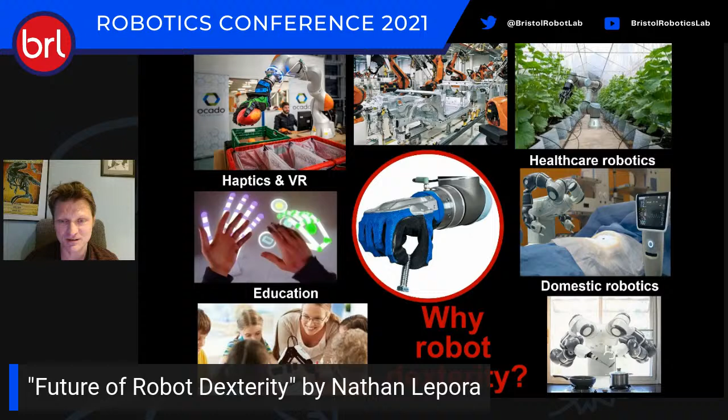So why would we want robot dexterity? This should kind of be obvious, because then robots can automate many of the jobs that we would like humans not to do but currently have to do — dangerous, dull jobs. They could be automated by robots if they had comparable dexterity to humans, which they don't currently have, because humans are still doing some of these quite difficult jobs. So that's why we need robot dexterity.

As I see it from my lens, it's kind of been the vision of the field since its inception, maybe 100 years ago or so. It's always been an elusive problem, but it does seem to be getting tackled at the moment, and there's been quite rapid progress made in the last 10 years or so, worldwide. I'm going to discuss contributions my group has been making in this area.

So the applications: once you get robots that can handle objects and the environment with the agility and dexterity of humans, a load of societally important applications become available — from automated logistics, distributing goods to customers automatically. A lot of that's still packaged by hand. Obviously advances in industrial automation, and agriculture, which is still a very human, laborious industry, particularly fruit picking and vegetable harvesting.

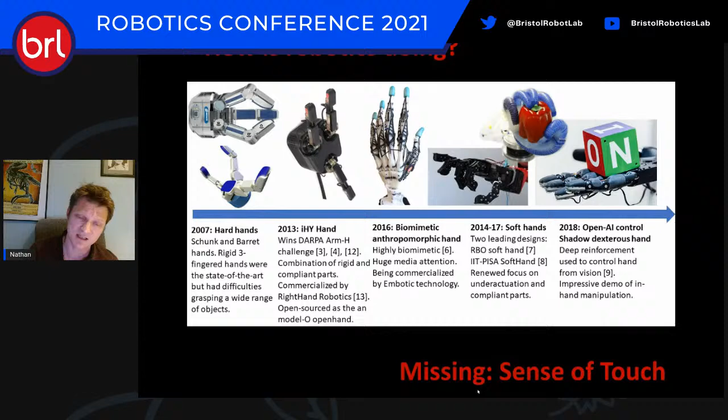So all of these hands and their applications are missing a sense of touch, and I'd see that as the missing ingredient needed to close the gap between the function of these sophisticated robot hands and the dexterity of the human hand. The human hand has been honed by millions of years of evolution into a general purpose manipulation device. Nothing else comes close. People talk about how fantastic crows are at tool use, or octopuses at unscrewing lids — we're surprised by that because it's something we can do, and we think of that as intelligent.

But actually, it completely pales into insignificance compared to the kind of things we can do with our hands, when you consider that all technology has basically stemmed from the use of our hands. I mean, you don't get animals building skyscrapers and digital computers, and to a large part, that has been enabled by our capabilities with our hands to develop technology.

So surely we should look to the human hand to design and deploy robots that are capable of human-like dexterity. And a necessary aspect of human hand function is our sense of touch. Our hands don't work properly if they don't have a sense of touch. So how do you do robot touch? This is the kind of question I asked myself several years ago when starting the lab. What do you need to do to get advanced robot touch that's similar to human touch?

Well, it's a challenge because of the number of different disciplines that are needed to address this problem of how to do robot touch. So you need to go from soft robotics, as I was discussing earlier, to advanced AI. That for sure is going to be critical in the control and use of the hands. We've had a revolution recently in AI over the last 5-10 years. So that's surely part of the puzzle.

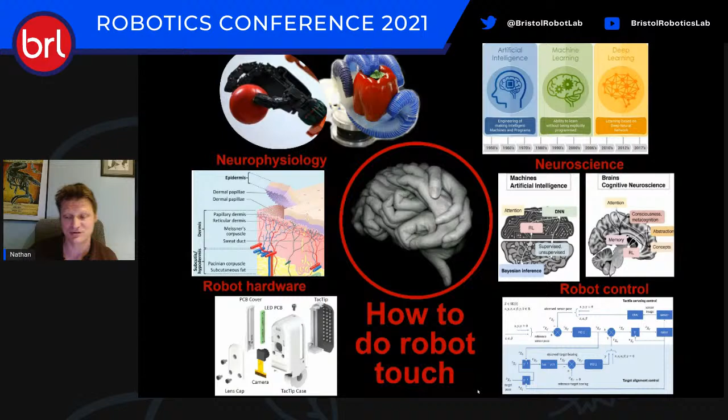And then you obviously need this hardware isn't available to buy, so you need to make it yourself in the lab. So you need to know about how to build and design robot hardware. And you also need to know about how to do robot control, where there's 50 years of expertise in robot control that you should look to as well for controlling these hands. So it's a challenge because of the interdisciplinarity that's required to tackle this question.

So coming to the work in my lab, I would see our place fitting into the field as soft biomimetic optical tactile sensing. So I'll explain what that means.

So the hardware that we use in my lab is called the BRL TacTip, tactile fingertip. It was invented before my time at Bristol. Jonathan Rossiter led that research. He's now obviously a well-known figure in Bristol, in soft robotics internationally. So he led that work with Craig Chorley and developed the original design of the TacTip about 12 years ago. And then I'll discuss what my lab has been doing with it since.

But the idea for the TacTip is it was inspired by the structures within human skin that I'll come to, that basically act as a kind of magnifier of the contact on the skin. And then there's a camera inside it, which I'll come to why that's a good thing in a minute. So it's a form of tactile sensor called an optical tactile sensor. So I kind of refer to this as a SoftBOTS because it's a soft sensor, it's biomimetic, it's optical, it uses a camera, and it's a tactile sensor. So I see that as a SoftBOTS.

Now, soft biomimetic optical tactile sensing - as I said, the key things are there's a biomimetic transduction mechanism, whereas the structure of the 3D printed tactile skin mimics the structure between the top two layers of human skin, the dermis and epidermis. In human skin, there's this 3D structure where the outer stiffer layer of skin, the epidermis, protrudes into the softer layers of skin underneath, the dermis, with these dermal papillae, and they act as levers in our skin, which amplifies the contact at the surface to the mechanoreceptors, which are distributed around these papillae, and basically turn that contact into nerve signals.

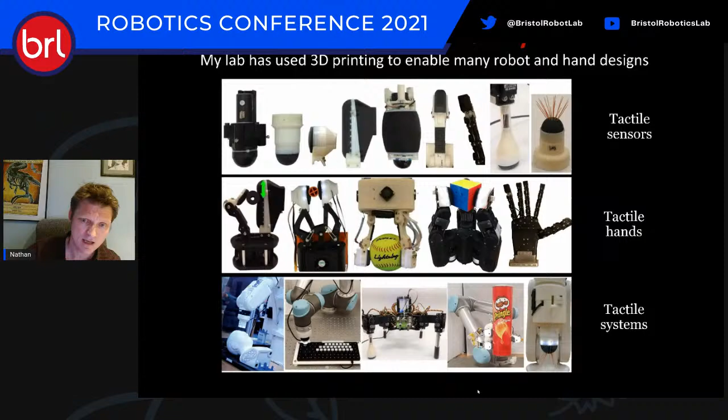Okay, so how does it work? It's biomimetic. In the skin, there are two types of mechanoreceptor, which turn skin deformation into nerve signals. One of those is called slowly adapting, which we represent as movement of the markers, and they give geometric information about the contact. Strangely, what they pick up is not pressure, not indentation in the skin, but shear in the skin because of these sideways movements of the markers.

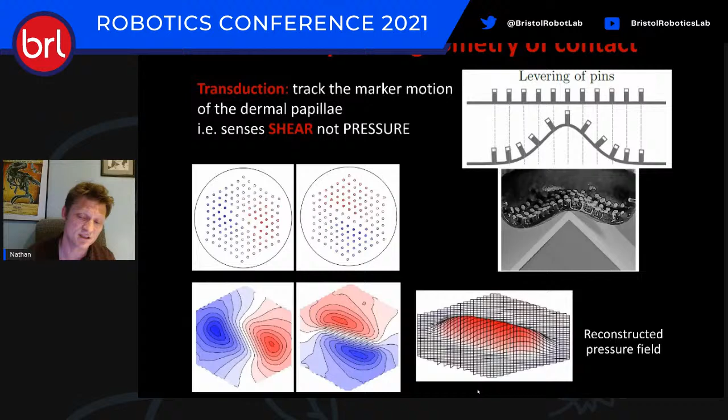Now, human skin is known to work in that same way. It's quite counterintuitive — we don't feel pressure directly, we actually feel shear directly at the surface of our skin. That is mimicked in this design of the sensor.

The other type of signal that comes from the skin, which we mimic in the tactile sensor, is called rapidly adapting sensors. We use a measure of marker speed for that, and it turns out that signal is really well suited for detecting changes in contact, such as slippage.

Now, slip is a really important capability for our hands, because the function of our hand is to pick up objects and carry on holding them. So it's important to know if we're about to drop them as we're manipulating or holding them. We have a sophisticated sense of slip detection in the skin.

It turns out that this design of the tactile sensor, although it was designed for different reasons — biomimicry and edge detection — gets this slip detection capability right. So this sensor is a very effective slip detector. We've had a stream of work with Jasper James, who's worked this through in depth.

There are other biomimetic functions that can be brought into the sensor that I won't go into here, but as a lab we've been looking into the other functions human skin does, the other properties it has, and how this can be brought into the design of the tactile sensor to give it the capabilities of human touch sensing, which we think are important for dexterity.

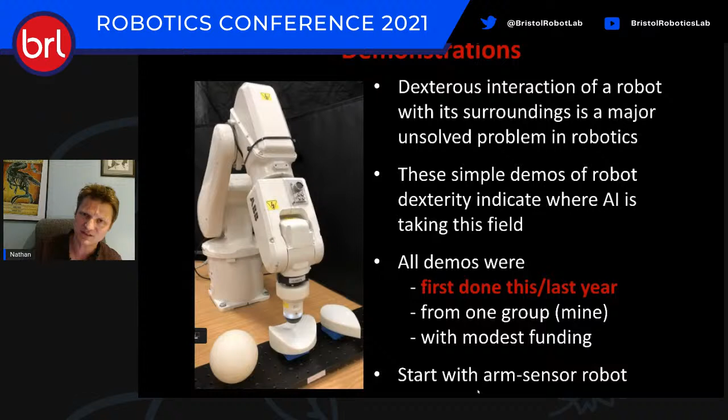All of these demos were done fairly recently in my lab, in the last year or two, and all of them relied on using AI techniques such as deep learning — that was really the enabling step to getting some of these capabilities you're about to see. The papers are at the bottom of the slides; if you notice, they're all 2020, 2021. I want to emphasize that, because it shows how quickly this field is moving — we're one group, and there's a large field in robotics advancing quite rapidly.

Firstly, on to tactile grasping. This was the hand that Jasper built, the tactile Model O. This is the hand I mentioned earlier that won the DARPA Grand Challenge, and then they open sourced the designs. We built those open source designs in our lab and integrated them with the tactip — we call this the tactile Model O. So I'll show you what kind of things we do, or Jasper does, with that.

So this is an example of a hand — the hand is very good at picking up objects. There's a few wires and stuff here; we've been working on improving the prettiness of it. But the hand is very good at picking up objects, because that's why it won the DARPA Grand Challenge.

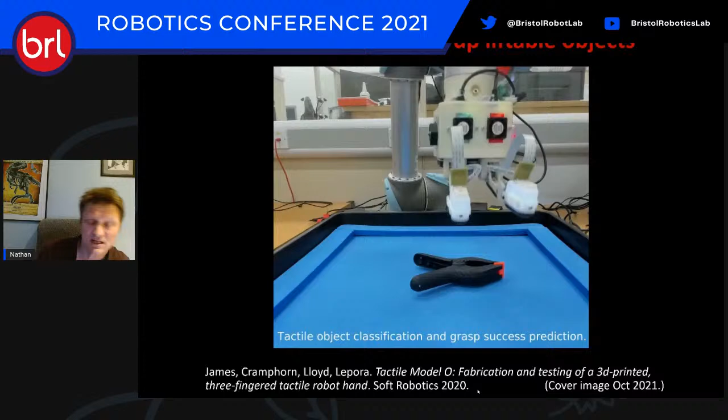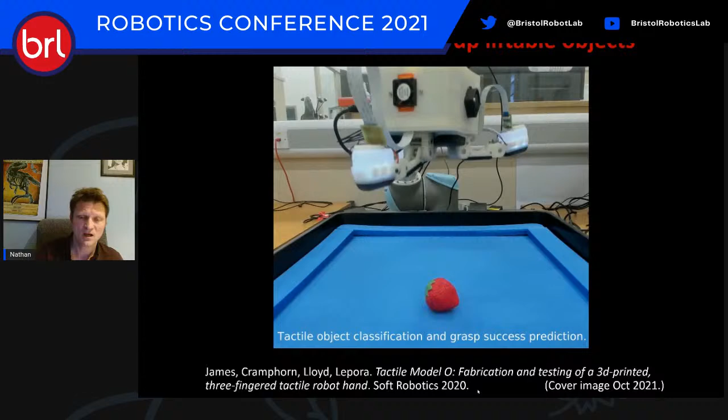What the tactile sensing here does is enable, firstly, recognizing what the item is—a useful capability. For example, in this case it will successfully recognize it's a strawberry. But another useful capability is predicting whether, when lifting that item, it's going to be a successful lift or not. That's useful—you want to know if your grasp is secure before you use it.

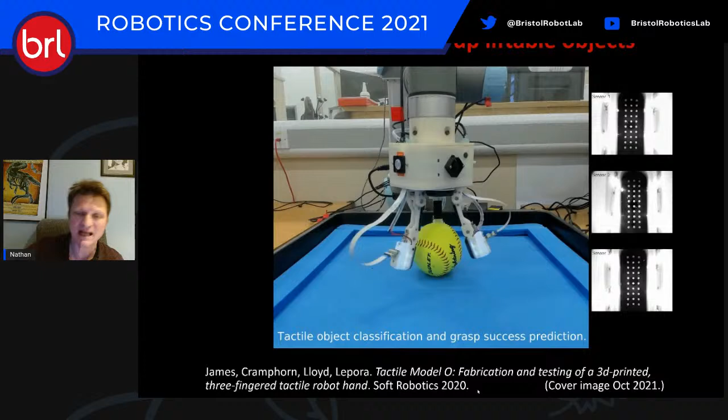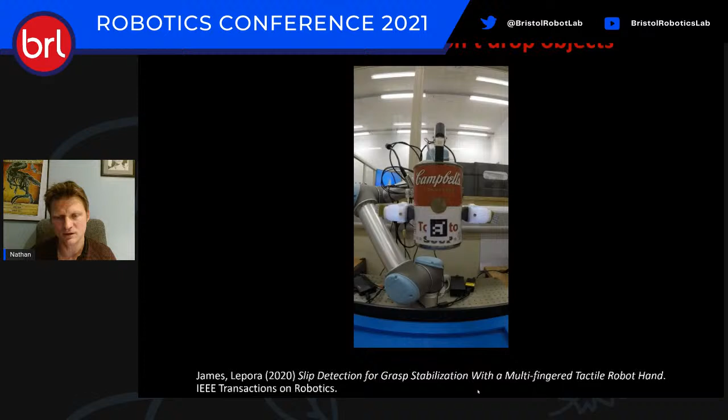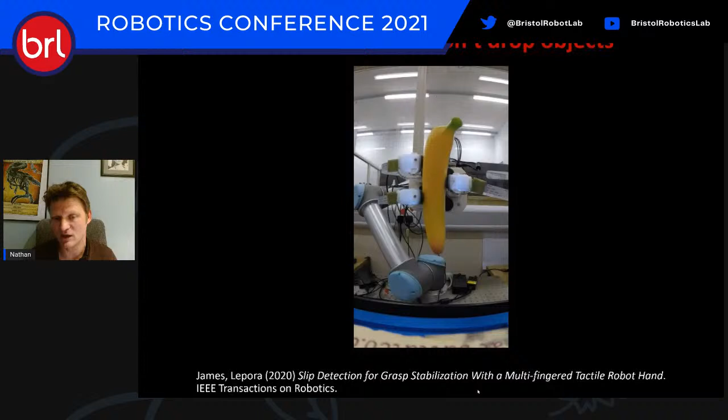Here's an example of slip detection. As I was saying earlier, the tactile sensor is an effective detector of slip. What it's doing is detecting global slip—relaxing the grip until the item begins to fall, then detecting it and managing to recatch it before the item slips from the grasp. This is actually quite hard because the robot has to react very quickly and reliably to recatch an object as it's literally falling. Jasper worked hard on this, and sometimes it fails, but 95% of the time it works, demonstrating that the hand can detect slip and correct for it through touch.

Okay, so I'll move on to some other applications now.

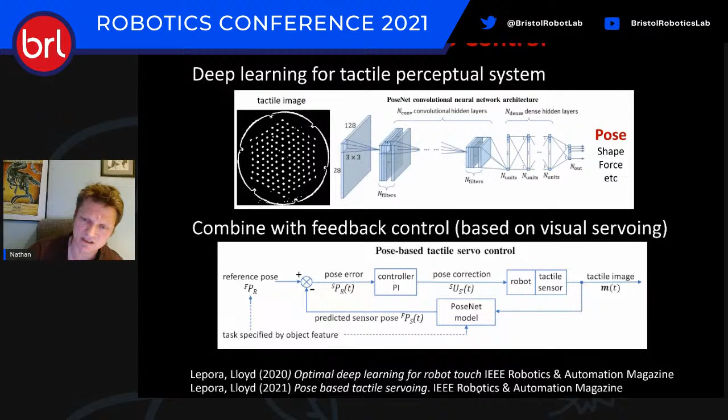So we're going to do tactile servo control. This is a combination of deep learning for tactile perception with feedback control based on visual servoing. The details aren't so important, but it's kind of analogous to a PI control loop, integrated with deep learning methods for processing the tactile data.

So this is the kind of thing you can do with that—you can now feel and explore over quite complex 3D shapes, just using a sense of touch, with a fairly basic controller but a fairly sophisticated perception system.

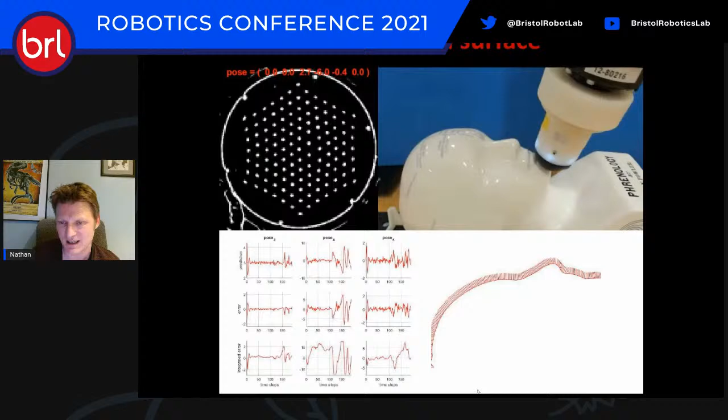There's a lot of generalization happening here. It was trained on something that didn't look at all like this porcelain bust—it was trained on a kind of flat plane, but then generalized well to this bust, and basically it just works. It feels over the shape, and it doesn't break itself or the shape.

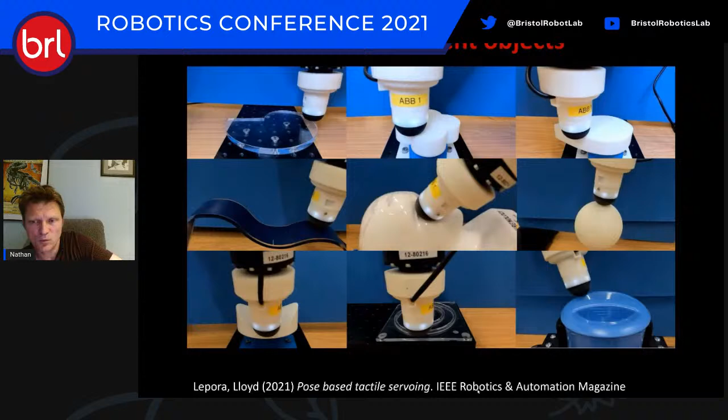And then the same algorithm, nothing's changed—exactly the same algorithm—because it has this kind of generality, can work feeling around all the complex shapes we had kicking around to try it out. This is a direct analogy of feeling over your face or your hair. It's something we perform subconsciously in humans all the time, but it's actually quite a challenging task to set up in robotics, and we managed to crack it using modern advances in AI to get these capabilities.

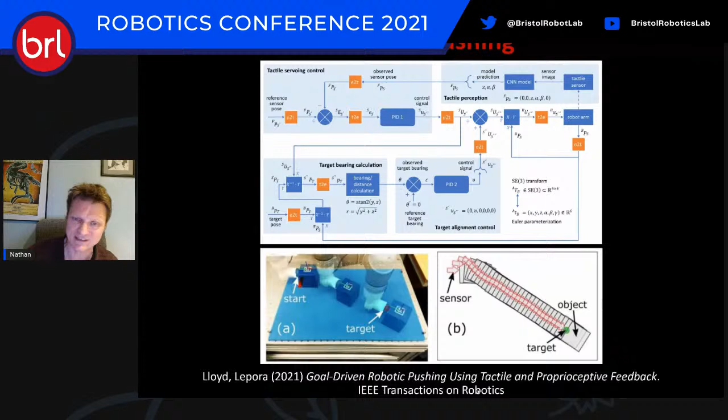Okay, so non-prehensile manipulation—this is manipulation not using hands, but using single fingers. It's also based on this tactile servo control, but John Lloyd, who did this work, is a better control engineer than I am, and he has a quite sophisticated control loop. But it's basically a version of servo control like I was showing earlier.

Now, just using a sense of touch and knowing a bit of information about where the end effector is and where you want to push the item to, it's able to push these objects to a desired goal location—successfully pushing them even in kind of adversarial conditions where you set it off in the wrong direction. So it works very robustly.

And then we threw some more objects at it to show its generality. The key thing here is we see this as a kind of precursor to in-hand manipulation, because this is sophisticated manipulation in a planar environment, and you can imagine scaling that to multiple fingers—you'd get, in principle, some quite sophisticated ways of interacting with objects. As I emphasized, this is just using a sense of touch, there's no vision here.

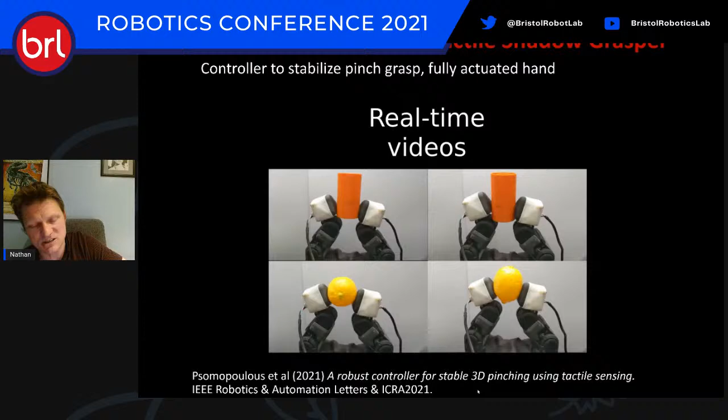It's kind of like blind pushing an object, and that appears to be cracked with this method. So in-hand manipulation, we're a bit behind where we are with non-prehensile manipulation, because of the extra difficulties in getting these methods to work on robot hands.

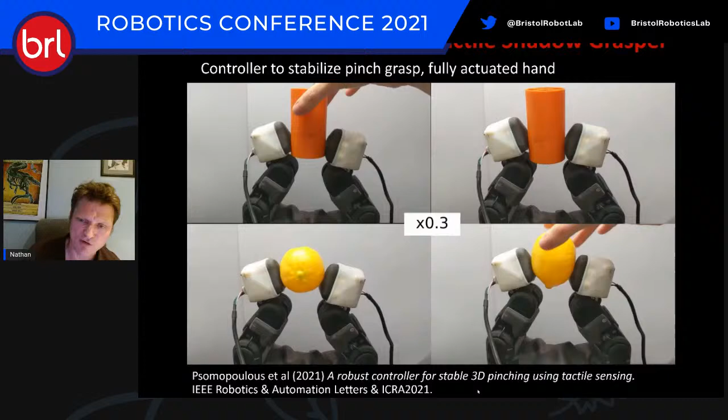But where we are, Effie's done some work recently on in-hand, a controller for stabilizing grasps with a fully actuated robot hand. This uses similar servo control methods, but instead the controller tries to stabilize holding the object, and then once you've held it, Effie's taken this work forward into how you can manipulate the object and move its pose around in hand, which is something she's working on at the moment.

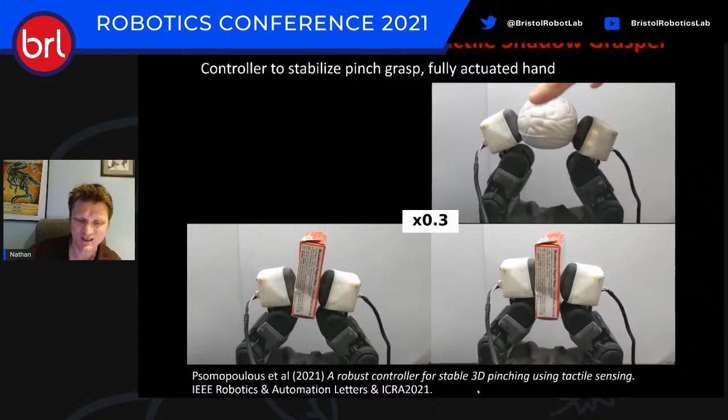We're also moving into integrating with anthropomorphic, human-like robot hands. One key thing to notice is that we have the sensor down at the same size as a human fingertip. That was a key developmental advance, because that's a route that wasn't possible before, but it's clearly key for using on realistic hands. Then there's a basic example of in-hand manipulation here, just to validate that the sensor's working. But this is, again, something we're taking forwards.

Okay, so I'm going to finish on tactile skill learning. This is a different way of approaching the control of touch. Again, we're using deep learning, but now instead we're using deep learning to predict the actions rather than trying to perceive aspects about the input. So it predicts what the robot should do. And then to train this, we're using deep reinforcement learning to learn a tactile skill.

You're just using reward to shape the task. If you give a robot a task, say pushing an item around, and it does it properly, it's given a reward, told good boy or girl, and then it tries to hone its action selection system in a way that it will get the most rewards in the future.

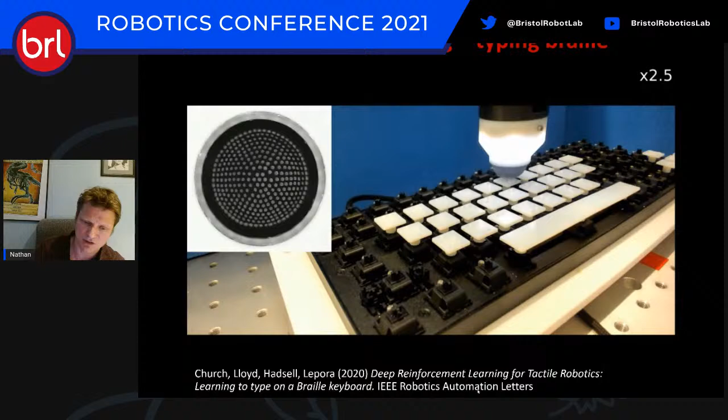These are the same methods that DeepMind used, and actually this work was in collaboration with DeepMind. These same methods have been used to play Go and beat humans at Atari games, etc., but here applied to a tactile robot. This is what Alex Church has been doing in his PhD, co-supervised with DeepMind with Raia Hadsell. This is the first demonstration in the field of deep reinforcement learning working with a tactile robot.

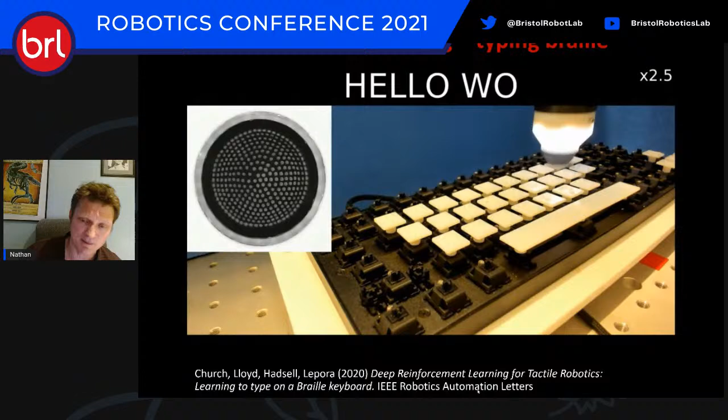This was learning to type on a Braille keyboard. The robot needed to learn the layout of the keyboard and the keys, and then in order to type, which took it a couple of days to do, but it got there.

That was published last year, and just out is Alex's latest work. Now instead the robot is trained completely in simulation, so it hasn't been near the real world. Alex set up a simulated environment on a fairly basic computer, not that advanced a simulation. He trained the action selection policy completely in simulation, and then through some clever machine AI methods, transferred that policy to the real world, and it works first time on the robot.

So basically the tasks I was shown before, that we could solve using more standard machine learning methods, can now also be learned using deep reinforcement learning in simulation, and then it just works first time on the robot.

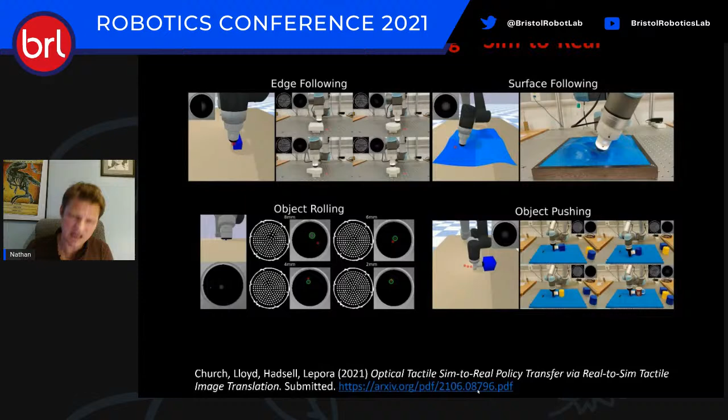We see this as a key step, because the challenge of applying deep reinforcement learning to robotics is the amount of data it needs to train. In learning how to play Go, they played literally millions or hundreds of millions of games to get the agents to learn. That's unrealistic on real robots because they have to work in the real world. But this technique enables that to happen, because they can learn in simulation and then transfer that to the real world.

Okay, so I can see I'm running out of time. I just want to do some take-home messages. Robot dexterity using... or shall I finish now? No, fine. You still have 4 minutes. There's one question in the chat as well, but please do your take-home messages, and then we maybe have time for questions. Okay, so this will take about a minute to 30 seconds.

So, take-home messages: robot dexterity using touch is still a pale shadow of human dexterity, but as you can see, all that progress I've talked about happened in the last year and a half or so, and this is just one lab, my lab.

There's about 15 people at BRL. At Bristol, there's a whole world of people working on this field who are also moving very rapidly as well. So this is really starting to look achievable as a goal, and I would see this as happening this decade. I'd say so, research in this field is moving very rapidly.

Deep learning appears to be the key to unlock human-like dexterity in robots, and in our lab that perfectly complements our use of soft biomimetic optical tactile sensing.

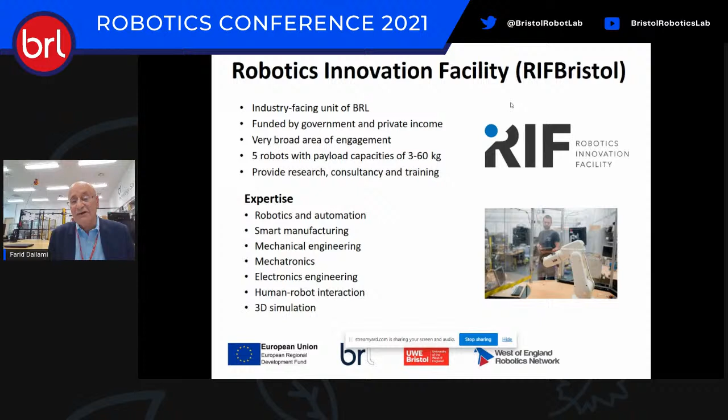So we're very fortunate insofar as we can help those who want to look at automation, robotics, digitalization, etc., by enabling them to come in and talk to us. We can demonstrate ideas using robots, we can talk to our colleagues in BRL, and essentially try to get a synergy with both hardware and software and expertise. So it's a very useful place to be for those who are aspiring to go into robotics and automation. Currently, we're running 3 different projects.

At the moment within RIF, we have something called RIF Saver, which is an ERDF funded project, and that allows us to provide, within close proximity to Bristol, a free service. I'll talk about that in a second.

We also have something called TERRINet. This is a pan-European project. So if you wish to do some robotics, and for example you're developing a medical instrument, we have colleagues in Italy, so you can contact them through us and go to Italy to do some very early stage work, and you'll get reimbursed for your travel costs, etc. It's an excellent mechanism. Please come to us if you have ideas about the sort of robotics you want to do, which is very advanced, around PhD type application, and we'll search around to see whether TERRINet can be of use to you.

We also are running a project at the moment with Rolls-Royce, where we're looking at using robots for welding. Again, this is something funded for about 3 years. So we do run a number of projects, and we engage with both application and research in those areas.

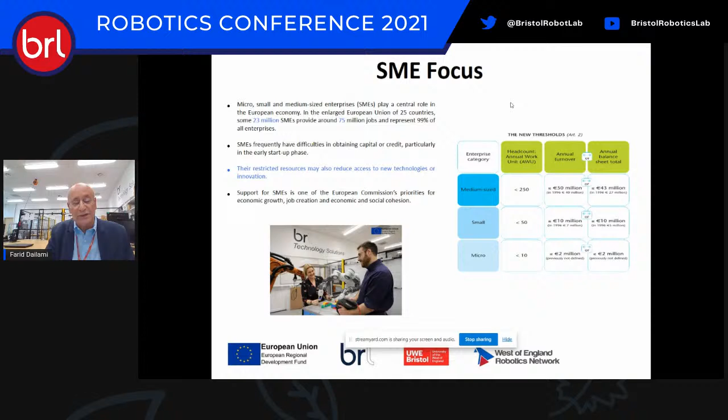That doesn't say that we don't engage with others. As I said, one of our projects at the moment is with Rolls-Royce. So we do engage with all manner of companies, but SMEs tend to be quite important to us.

To some extent, this is the sort of thing we're trying to help with. When you're looking at technology maturity, we can start in a lab and develop ideas, and there is funding available, so we can get ourselves up to a certain stage with that funding. But then once we're at that stage, funding dries up. This region is called the Valley of Death, where good ideas can actually die because there is no monetary support.

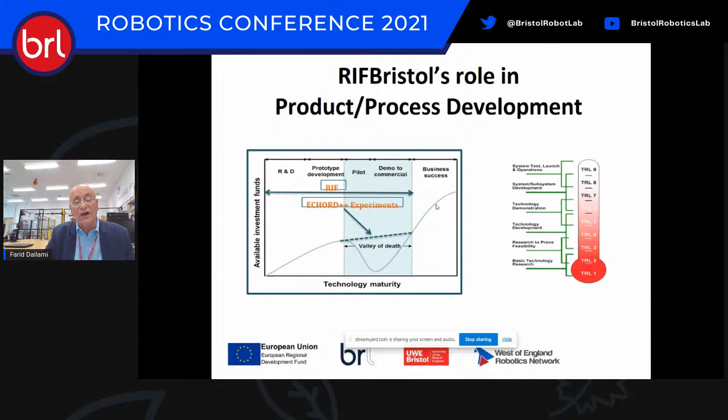So what we tend to do is try to see if we can bridge that gap with the capabilities and funding that we have. We've gone beyond stage 3 and 4, trying to get ourselves to TRL 5 and 6, to try and cross this funding gap, and then hopefully take the company, the product, etc., up to the stage where they can become a business success, in terms of knowledge acquisition, knowledge embedding, and exploitation, which are the key stages of innovation.

That's what we're trying to do. We in RIF are very good at identifying what sort of knowledge you need in terms of implementing robotics, digitalization and automation. We have access to lots of expertise inside RIF and outside, to enable you to raise your awareness of what knowledge is available, in order to put that knowledge into your product or your processes, and hopefully get to a stage where you can do exploitation, and then claim that you have an innovative process or project. So RIF is very instrumental in meeting that very early stage knowledge acquisition.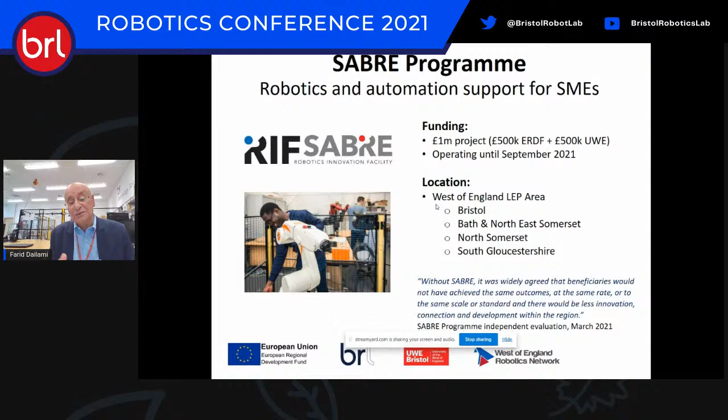In terms of funding, the current program running is SABRE, and we have about £1 million. We've had about £1 million, and we will finish around September 2021. But there are efforts afoot to try and extend that and go for another 2 years if we can. It is centered around Bristol, and it is centered on SMEs. So if you're an SME in this area, and you have some ideas in terms of automation and robotics, please do contact us, and we might be able to help you and enable you to get

your aspirations realized. The kind of product we have is a 2-day workshop. So we bring you in, we talk to you about robots, and we let you play with robots.

So it's not a question of just chalk and talk. The core of it is for you to get experience in terms of robotics. So if you have some interest in that area, please do contact us. At the moment, COVID has caused some issues with that, but as soon as that disappears, hopefully we'll get back to normal and be able to start having physical workshops in this place. But do contact us so that we can start to put you in our program.

The other mechanism that we can engage with you on is called a technical development project. As an engagement, we can work with you from around 5 days to 12 weeks. So if you're eligible for SABRE support, then this is something that we can do with you. We can do feasibility, we can do prototype development. There are many mechanisms by which we can engage with you.

So in terms of some case studies and some examples, here's an example of somebody who came in. Basically, what this person does is develop natural history footage. Some of the areas that he works in are producing footage for insects and ants and stuff like that. And basically, what he wanted was to try and capture footage of, say, ants moving around on a bark of a tree.

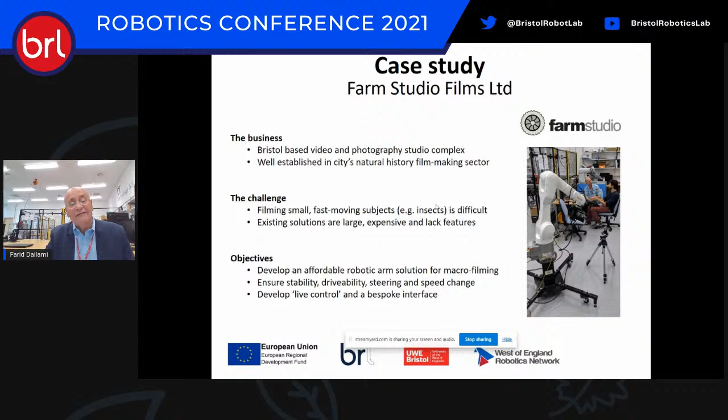We brought that in and put the camera on that machine and developed the software and ran that particular arrangement of camera and smaller robot, and we got excellent footage. So the company was then thinking, okay, we can get this, and they did. It was affordable as far as they were concerned. It wasn't a brand new robot; it was a reconditioned robot, but nevertheless, it fulfilled their requirements. Now they have one of those in their place, and they can do various types of footage.

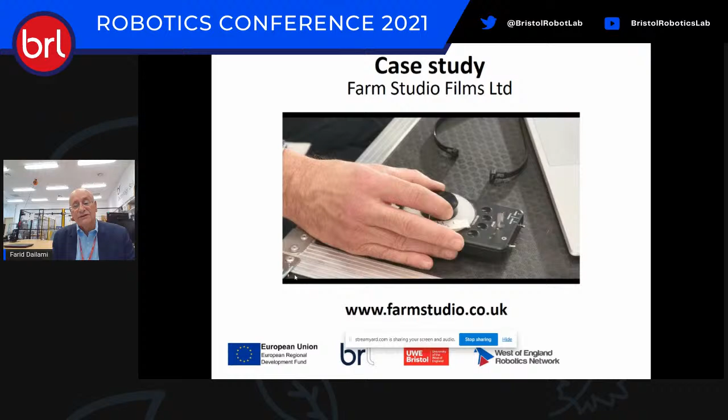Just as an example of the sort of thing that he's been doing - he's not a roboticist, but he's controlling that robot with some of the software that we produced for him, and now he's capable of... this was a trial... capturing excellent footage using that particular system. So that was a huge success. He's delighted with what he's getting.

We had another company that came in, and they are again a startup. They were looking at laying down composite bands in manufacture of composite components. They have a very new process whereby they can, if you like, shear the fibers as they're laying the fibers down. That will allow them to change direction of motion and will allow them then to basically produce complex shapes. And they came to us and said, this is something that we want to do, but we're not quite sure how we integrate our end effector that sits on the end of the robot with a robot. How would we go about that?

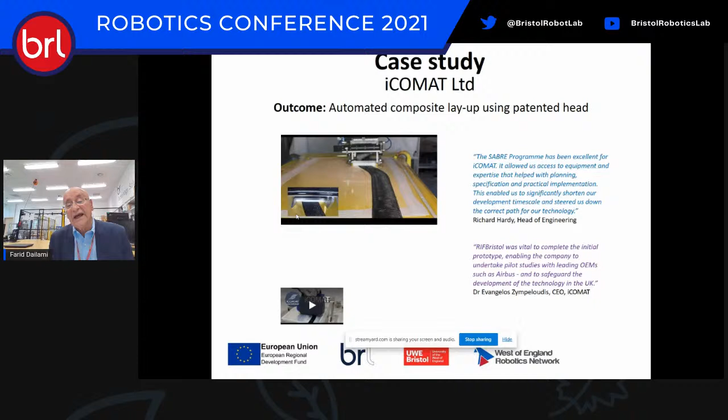We addressed that. One of our engineers looked at that, and we did the integration. And what happened after that was that we now have this kind of demonstration. You can see the shearing is taking place, and the direction is changing without wrinkling or introducing other defects in the lay-up. So this again has proved extremely useful. Without the existence of RIF, it would have been difficult for ICOMAT to have progressed as far as they have. So this is another example of the kind of thing that we've been able to do.

We've recently been working with a company that produces a gap measuring kit.

So if you imagine you have a car door and there is a gap between the car door when it's shut and the body. One of the applications is that their laser-based equipment can actually measure the gap and the depth, but they wanted to mount it on a robot. So they came to us and said, well, we know we can hold this device by hand and scan, but we want to automate the process. Can we do this? And again, we demonstrated for them that yes, this was something that we could do.

In the process, we collaborated with Universal Robots, and Universal Robots have developed an intermediate set of tools that will allow developers to develop interface tools between what the end effector tool is and what the UR system is. We have developed that kind of interface for Third Dimension, and that again has worked out exceptionally well. We have a little video from UR.

Hello everybody, my name is Stefan Kollmannsberger and I'm working at the UR Plus team at Universal Robots. We at Universal Robots aim to enable access to automation to everyone. With this in mind, our cobot is laid out to be programmed so easily that non-robot experts can create their own applications. We include a wide variety of safety functions to reduce the time for a proper integration substantially, which can even allow the cobot to work side by side with its coworkers. As our cobots are integrated in a wide array of different applications, they always interact with different third-party products, like grippers, camera systems, linear axes, etc. The integration of these parts alone could take days and needs expert knowledge to implement, which is in contrast to the overall UR programming experience. To counter this, Universal Robots created the Universal Robots Plus Partner Program, or short, the UR Plus program. The UR Plus program behaves like an ecosystem of plug-and-produce products, which are validated and tested by UR to assure compatibility and ease of use with our cobot, and are focused on our customer needs. This means we support our partner companies all around the globe, integrating their products into our cobot. With this, by purchasing a UR Plus product, you do not only receive the needed hardware to connect directly to the UR, but also get a piece of software, the so-called UR Cap, which is tailored to the product's needs, lives within our teaching environment, and offers you the same easy programming experience as the UR itself. Since introduction in 2016, the UR Plus ecosystem grew steadily, with now over 200 UR Plus products available in Europe alone. On this journey, we also met the company Third Dimension, located in Bristol, and the Bristol Robotics Laboratory. Third Dimension offers great non-contact profile measurement solutions, which are also fitting for being operated by a robot. Seeing the opportunity for a collaboration, they reached out to us and we started the process of becoming a UR Plus partner with them. During this, the Bristol Robotics Laboratory helped Third Dimension by developing the UR Cap, the software controlling Third Dimension's tool through the Universal Robot. It was an outstanding experience working together with the Bristol Robotics Laboratory and Third Dimension, as they were doing an excellent job integrating their product in the UR and offering an elaborated and easy-to-use solution for our cobot. Thanks to all the colleagues of Third Dimension and Bristol Robotics Laboratory for allowing us to be part in this great journey. We're looking forward to having this product in our UR Plus ecosystem soon. Greetings from Munich and all the best. Bye.

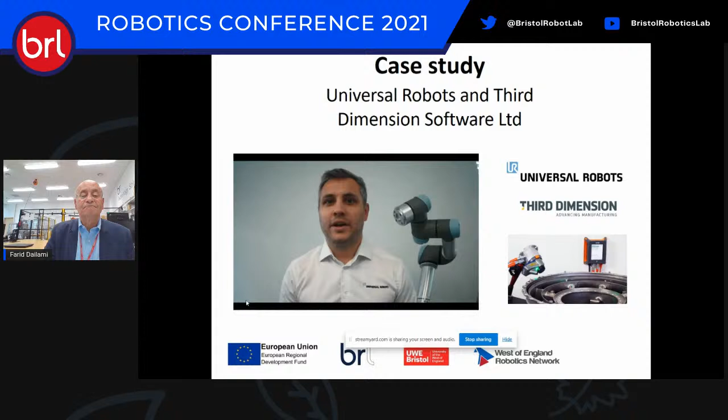So that's an example of the kind of thing that we can do with both, if you like, a robot supplier and a client. We can really go deep into that collaboration and develop very useful tools to allow very quick programming of end effector tools. Both the one with Universal and the one with KUKA have proven that, yes, we are well capable of developing facilities for people who want to use robots.

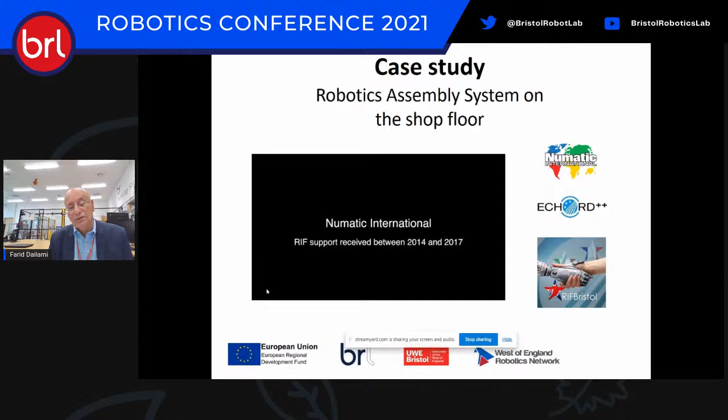We also have worked on much bigger projects. This one was with Numatic International, people who make vacuum cleaners. This is an example of the kind of thing that we got engaged with, again, very deeply, trying to figure out how can we reduce repetitive strain injury and allow the company to improve its productivity. And this is what we did. We developed a robotic application, again using various tools to try and explore potentials for looking at assembly of vacuum cleaners. This was then taken into the development shop at Numatic, and they developed, with our guidance, this particular assembly process. And we got to a stage where we could demonstrate the effectiveness of this process.

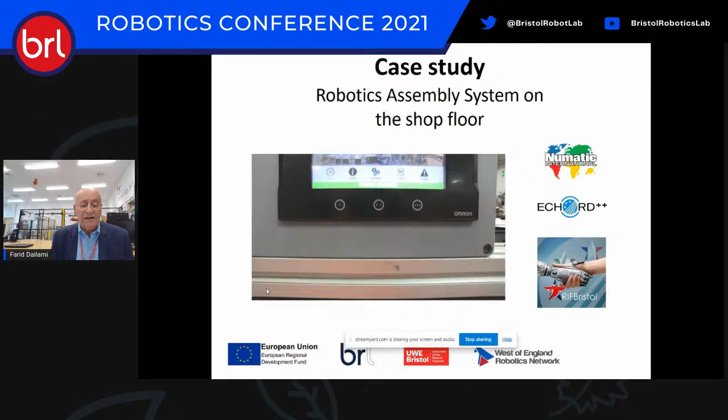And now what you see on the screen is a version of that sitting on the shop floor, producing vacuum cleaners, assembling vacuum cleaners. They have found this particular setup to be so effective that they have now replicated it four times. So again, it's been an excellent example of, in the right application with the right process and the right type of investigation, you can develop very effective automated and robotic solutions.

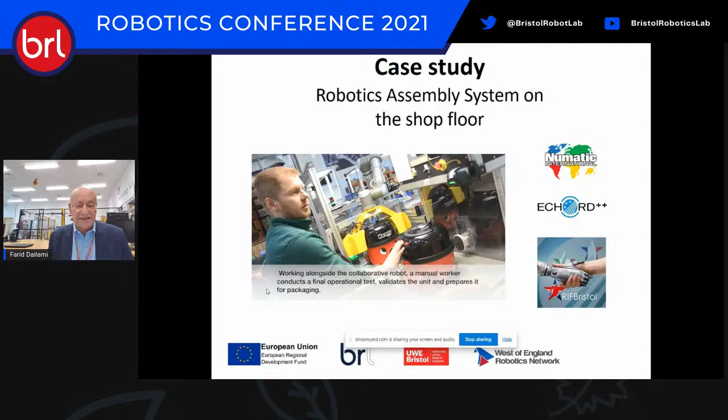And this is what we have managed to do with Numatic.

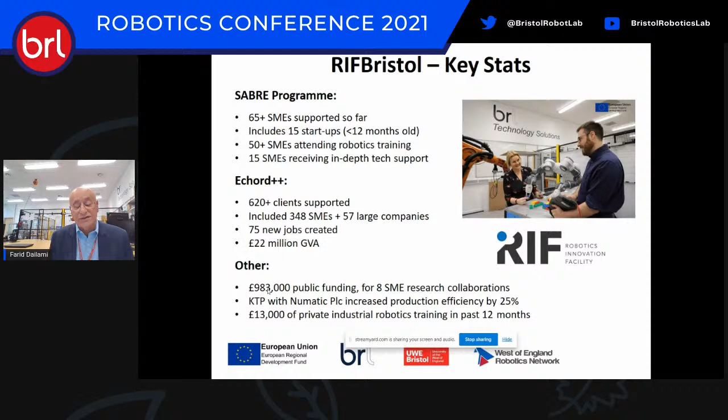Some of the key stats as far as Sabre is concerned, as far as the whole RIF is concerned really, we've helped, as the numbers show, lots of companies get engaged with robotics and automation. One of the good numbers is the gross value added figure we have, which is around 22 million. It's not been over a couple of days - this has taken quite a while. We've been doing this sort of work since 2013, so it's taken a long time to get to this place.

And with that, I am going to stop and see if there are any questions.

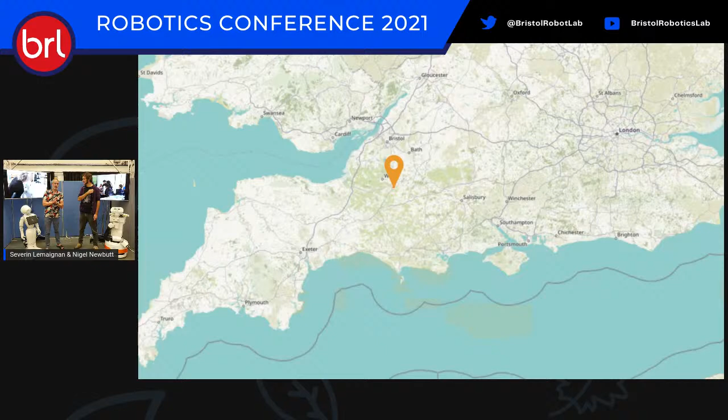But before we get to that, this is where the school's located. It's in Somerset, about 25 miles south of Bristol, which is where we are at the moment. It's considered a rural school, actually. There's 144 pupils, and it's a fairly new school, about 4 or 5 years old now.

So the main idea was, how can we design a social robot behavior that makes sense for those children? One of the challenges within robots and autistic research in particular is that it's often led by researchers framing the problems and wanting to think about how a robot like this may be used.

But what we wanted to do was learn from the pupils themselves how they might like to see a robot like this used in their school. So as Severin has already said, we engaged with a co-design or participatory design methodology, and we spent a day in the school working with some pupils, asking them their views.

That's the information we took forward in terms of building some interactions with Pepper. So we went back to the lab with all these ideas coming directly from the children. We also talked to the teachers, and we also talked to some other autistic adults to get their additional feedback.

We went back to the whiteboard, trying to come up with a way to program that into the robot. So you have this picture of Nigel in front of the screen and us mind mapping a behavior. What you might be able to see on that screen as well is this column of blue little boxes - do you want to tell us more about that?

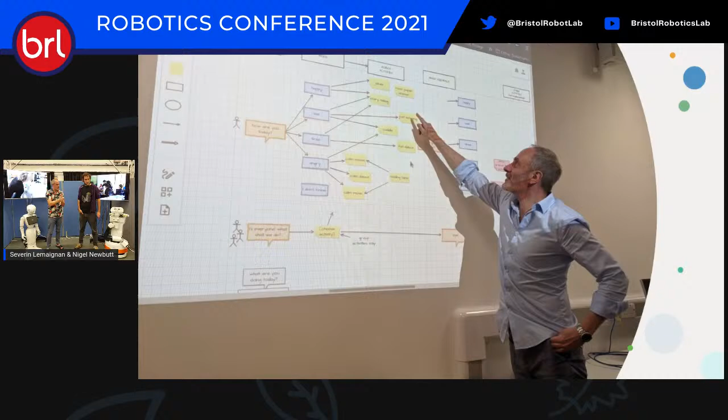So what we did here was identify that an individual interfacing with Pepper through the screen could articulate how they were feeling - happy, angry, sad, motivated, unmotivated. When we worked with the teachers, they gave us some interfaces they use, and we were able to integrate that. So essentially what we designed with the pupils was an interface where they say how they're feeling, and based on that, they're presented with a range of interaction options they can interface with Pepper through.

So we had those 4 big categories of feelings, moods, and based on that we created a behavioral tree that would lead to a set of activities. You can see on that screen some of those activities.

One thing that's quite important to say is that even though the robot is overall autonomous, we are not teleoperating it when it's operating in the school. Everything is child-led. The robot will suggest activities, but it's always down to the child to decide what they actually want to do.

It's worth pointing out that the pupils told us, or we proposed that being in the classroom may be where they'd see Pepper being useful, but actually they told us being in the corridors and communal areas of the school were where they preferred to interface with Pepper. So we position Pepper in the corridors, near the lockers and the bathrooms, and the pupils come out of the classrooms to interface with Pepper at various points during the day, both during break times and during formal teaching times when the teachers enable the pupils to go out and interface with Pepper.

That's actually something really important. Contrary to a lot of previous research on robotics and autism, where robots were usually used to teach social skills to children, our approach is quite different. We are really focusing on well-being.

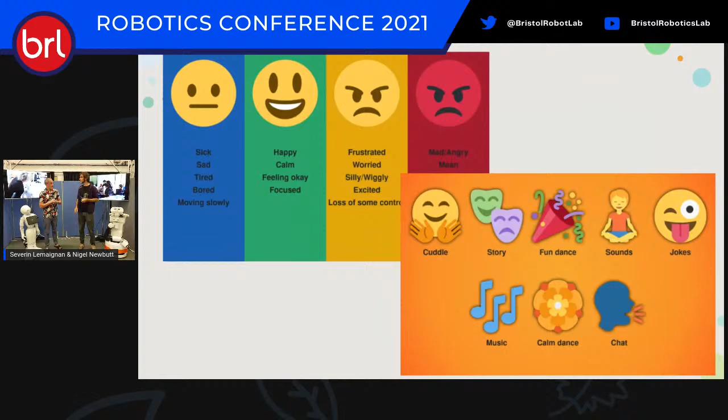We went to the school, and we're going to show you a quick 2 minute video that was filmed last week by the media team here at UWE, showing a little bit of what was going on in the school.

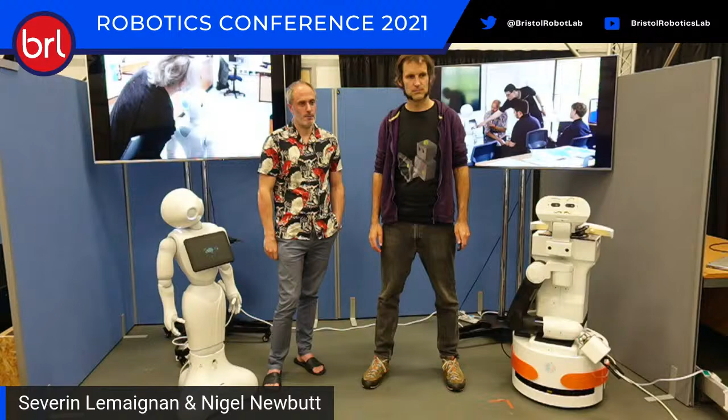Hello, I'm Pepper, a social robot from the University of the West of England. My researchers are sending me to the Mendip School to live there with the children for 3 weeks. So the project involves bringing a social robot called Pepper into a school for autistic children to help them with their emotional well-being and also their learning. This project first of all positions autistic young people at the centre of the research, and what we're looking to do is understand from them how a social robot can be embedded and utilised in their school. We're currently in the process of evaluating what interactions the young people are having.

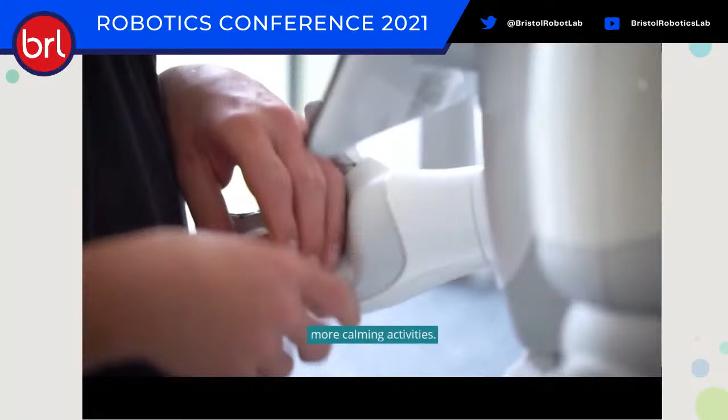Hi, good to see you. What do you like to do? The robot is programmed to first ask how the children feel, and based on that it will offer a range of activities. It can be telling a joke, but some children told us they like more calming activities. Would you like to listen to some music? Or I could do a cuddle? Good, calms you down, actually does. Pepper can tell a story, do fun dances, just listen to you, play music, stuff like that. I've been listening to some of her jokes, they're not hilarious, but they're not boring, they're moderately funny. Joke time: why did the kid cross the playground to get to the other slide? Now that was a good one.

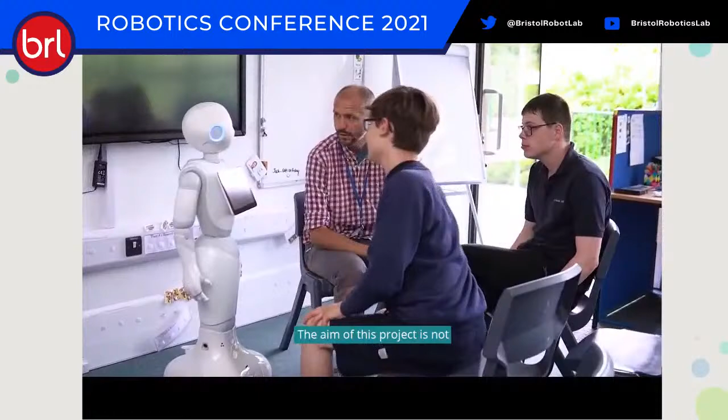Pepper allows us as teachers to provide opportunities for our young people that aren't ready to have social interactions with other adults yet. Children have reacted to Pepper in a number of different ways, some of it really positive. There's been a lot of dancing taking place, and we've seen increasing numbers of groups around Pepper, so children that wouldn't normally socially interact with each other are now interacting with each other. The aim of this project is not to look at how robots can potentially replace teachers, but rather listening to autistic voices and the teachers in terms of how this tool can best support them in this setting.

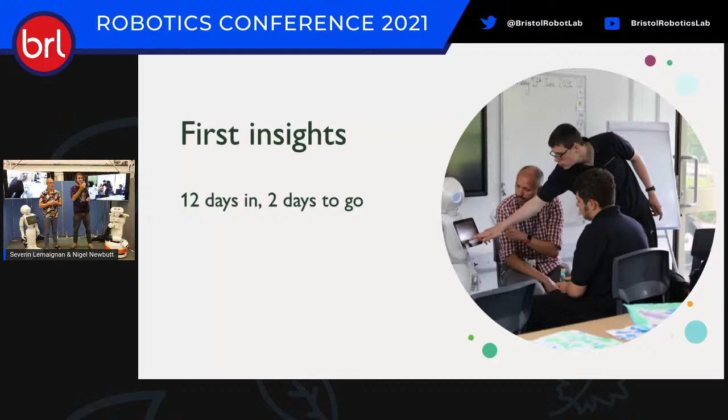Excellent. Cool. So that gives you a bit of a feeling for what is actually happening. The robot is still in the school until the end of this week, and although it's a bit too early to draw final conclusions, we thought it'd be nice to show you some initial results. We were recording on the robot every time an interaction took place, what the children did with the robot.

The real question for us now is, for the last couple of days, are we going to maintain a level of social interactions, a level of interactions? And if so, what are those interactions? Because that's a real question we are asking. Those children who are still interacting with the robot after 3 weeks, they probably need something from the robot or are looking for something with the robot. So that is really the focus of those last few days.

One thing that we've also noticed across that picture, which I'm not sure if the next data set will elaborate, is that there are similar pupils returning to the robot now. Initially there was a lot of different pupils arriving at the robot to interface with it. Now, although that's tapered off, there are more similar people coming back to interface with the robot. So we're trying to understand why that's happening and what they're really seeking to do with that.

And while these charts are lovely, we're going to make sure we go back to the school after to capture some of that qualitative voice of the pupils and the teachers as to why they were doing it. So that graph kind of relates to that as well.

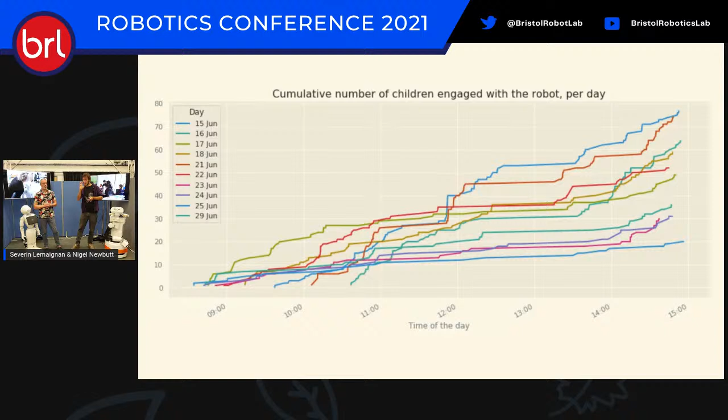And I think it's important to point out as well that the pupils, although calming is very important in terms of being quite heightened and excited, to help reduce those activities, actually it's important to point out that sometimes children need to be kind of excited and geed up and to get into that sort of zone. So some of these activities are pointed towards the fact that some children are using them to calm down from a state of excitement, but also using it to actually excite them as well, to get them into a place where they're ready to learn.

And maybe a last graph that is quite interesting.

Every time a child starts to interact with the robot, it asks, how do you feel today? So we had four big groups: I feel happy, I feel maybe a bit sad or down, I feel frustrated or worried, or I feel angry. That's the green, the blue, the yellow, and the red you see on that picture.

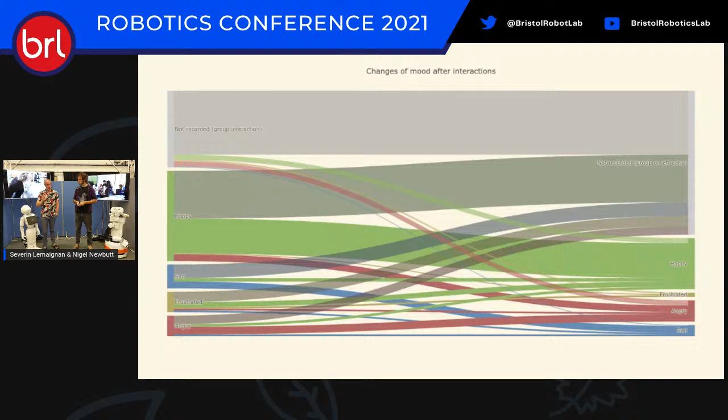It's worth pointing out that our researcher Joe Dailami, who's in the school helping us capture these interactions, mostly automated through a device and interface that Severin designed, but he's also trying to pick up on those returning pupils and gain insight as to why they're returning. Beyond that, we're not only interested in numbers and figures - a lot of our work is to build up a kind of qualitative assessment of the impact of the robot on the school.

It's important to point out that this work is positioned in a co-design context, but it's also triangulating data points. We're really keen to bring in quantifiable information in terms of how many times people interface with the robot, what type of interfaces they had, but also why they had those interfaces. So we're looking to triangulate the voices of the autistic pupils and the teachers.

But we've also had comments where people suggested the robot's a bit creepy and they don't like it, they want it turned off. It's worth pointing out that we've worked very closely with the teachers to manage that situation with that particular pupil, and we've been very responsive and adaptive to how we've used the robot in the school.

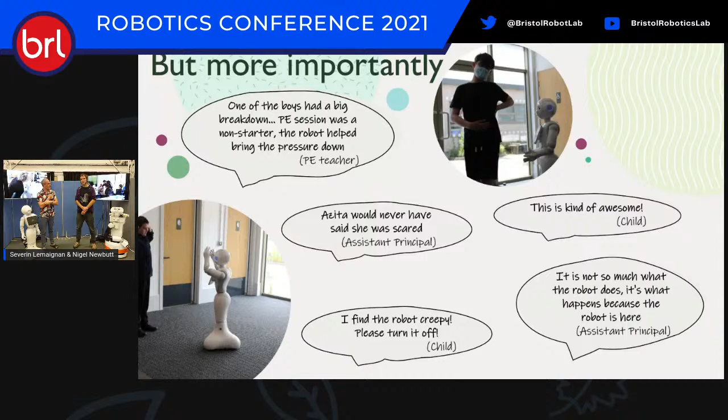So the child that said they found the robot creepy and turned it off - we worked very closely with that pupil and teacher to be reassured that keeping the robot and the study going has been appropriate. I'd also like to acknowledge the contribution of our colleague Vicky Charisi, who works for the EU but also with UNICEF. We've been looking with her at how we can design a process, a methodology, and ultimately a robot that respects the children, is ethical, responsible, and takes into account the best interest of the children.

This is very much about positioning children's voices centrally and making sure we listen to those and have those come out of the research that we're doing.

And as you said, Vicky's very interested in supporting that work and having that work inform the future of child-robot interactions. So we still have a couple of days to go, well, until the end of the week. Hopefully in the next couple of weeks we will have a really good look at the results, trying to draw a few conclusions.

Can a social robot like Pepper have a positive impact on a school, for the well-being of the children, for the general dynamics of the school? The answer might be yes. The answer might be, well, maybe not so much. That's really what we're trying to look into now.

Hopefully you've been able to hear some of the anecdotal evidence we've had so far, and some of the more robust quantifiable evidence. But it's also important to point out that the teachers' responses - we've been catching up with teachers every day, and they're still reporting a positive aura around having this type of technology in their school, and they're already talking about ways to continue with it. I think one of the benefits of working in situ, in the school, is that teachers really get to see the benefit of this stuff, and they get to see some of the challenges as well as the benefits.

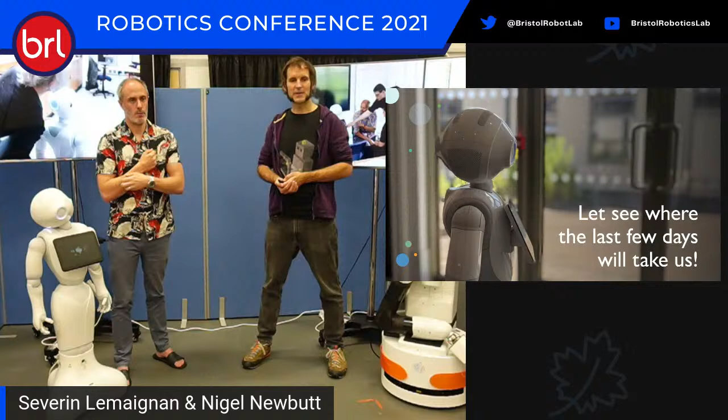And I see Pepper is also saying goodbye there. So yeah, thank you for a great talk. Thanks, Nigel. Thanks, Séverin.

So we do have questions in the chat, and I'm going to show the questions. The first question is by Sally Hall, and she says, great talk and interesting product - wondering about the choice to make Pepper look semi-humanoid. Is there a move to make Pepper less or more human-like?

It's probably quite important to start by saying that we haven't built that robot ourselves. Pepper is a robot that we can buy, made by a company called SoftBank Robotics, based in Paris. You're right, the design of Pepper is indeed anthropomorphic - it looks a little bit like a human, but it's not quite there yet. I think the design of Pepper is actually quite interesting - it's somewhere in the middle.

I don't think there's any kind of golden rule saying we should take a very human-like robot or not so human-like robot - you can see Tiago on my left, who is not like that. However, one thing that was really important for us in this study is that the robot is perceived as a social agent. By social agent, we mean something that you want to relate to, that you can relate with, and that you can engage with beyond just, oh, I'm a fancy tablet with an expensive head.

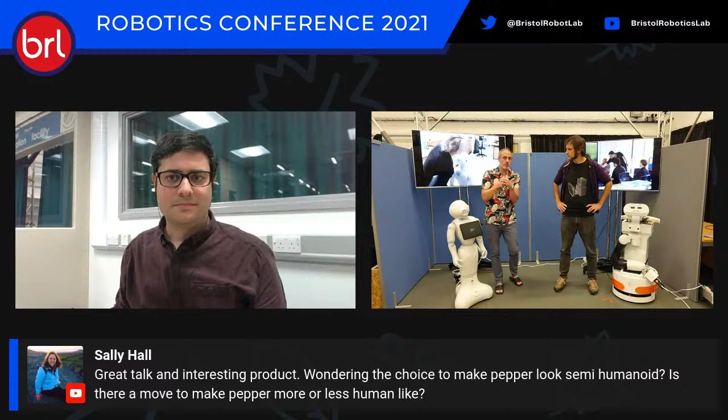There's something that the pupils can identify as this being lifelike, but it's not too lifelike. One of the propositions with technology for autistic groups is that it can remove a human dimension of interface, and I think Pepper bridges that quite nicely. But yeah, thank you for your question.

Yeah, thank you. Maybe as a quick follow-up - I quite like your participatory approach, where you ask the students what is it actually that you want and need. But did you also talk to the students about the design of the robot? Would they be interested to design the robot's appearance?

That's a great question actually, because we haven't really... if I'm correct, I don't think that question was raised by the children much. When we introduced Pepper, willingly or not, we kind of said that's what we're going to use. From that point on, we were really discussing with the children what the robot should do, not so much how it should look like. That's a really interesting question, because I was expecting the children to tell us, oh, I don't really like it in white, I think it's a bit boring, it would be nicer if it could be more colorful, or have some clothing.

Actually, clothing is a good one. I think you did have something from the teachers on that. Yeah, it did come up from the teachers briefly, but on the whole there was no query about how Pepper looked. They accepted that quite quickly, and we moved into how Pepper could be used in that space. So that, I think, left in the school for longer, or if we were to continue this work, which we hope to, that would be something to potentially address. I've certainly seen examples where Pepper was indeed in the school for a long period of time and would end up completely dressed up or colored or covered with stickers and things like that.

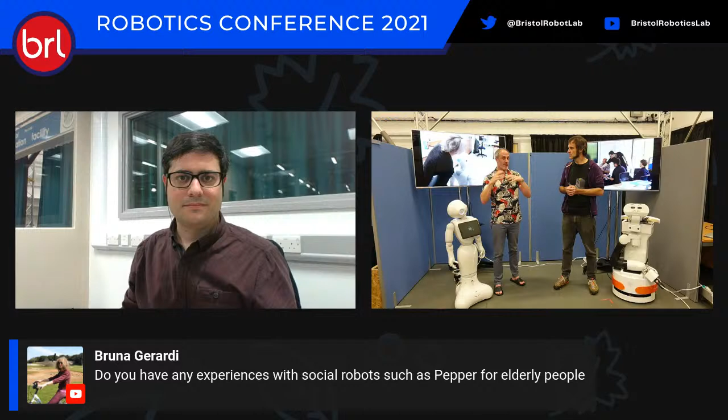I don't know if you had a chance to hear some of the talks by my colleague Praminda Caleb-Solly today. If you haven't, I really encourage you to check on YouTube the catch-up streams, because she is our local expert on assistive robotics. The short answer is yes, we can definitely use those robots with the elderly. As Nigel mentioned, the size of the robot makes it especially well suited for children, so there's a lot of value in using that robot with children. Just to underscore the elderly populations that Pepper has been used with, there's a study conducted by the University of Bedfordshire, I want to say during the COVID pandemic, looking at how a robot like Pepper can be used in support of elderly provision, where there's been obviously a lot of issues with people feeling lonely. So there's a research project undertaken there which might be worth looking up as well.

Now, I also want to add one thing, which is a robot like Pepper - if you look at it, watch it while we're talking, it seems to be kind of paying attention to us. He's looking at Nigel right now. He has this very human-like, really well done gestures. However, it's important to realize that a robot like that, if you were to talk to it, you would very quickly realize how limited it is in terms of being able to sustain any meaningful conversation. To be honest with you, it worked quite well for us in the school, because we have that set of predefined activities, where we are very careful to limit the cognitive complexity of those activities. If you were to take a robot like that to your nan, hoping that it would be able to entertain her, that would not work very well. After a couple of days, you would realize that the robot cannot yet do very much in terms of social interactions.

Great, we do have more time. So Alex asks, what would be the next steps for robots in the school?

That's a good question, and that's what we're still in the midst of the study at the moment, so I think it would be premature for us to share what that might be. We're looking forward to continuing conversations with the school and the leadership team, and to debrief what exactly has happened here and what we've found.

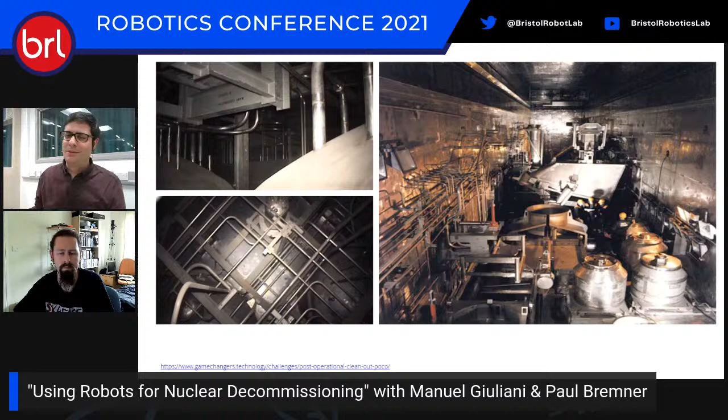Just to give you another idea, these buildings are not simply something you can knock down. We are talking about buildings that are really compact, with no access ports into the buildings. Inside, you have a lot of different materials: metal, concrete, bricks, dust. And of course these are nuclear facilities, so they are designed so that no one can actually go inside. So the kind of problems we are working with here are these very hard to access buildings.

In the past 4 years, we've had the luck to be funded by the Engineering and Physical Sciences Research Council - thank you to our funder - in 2 large projects: the National Center for Nuclear Robotics, and Robotics for Nuclear Environments. We're going to show you now a little bit of the work we've done in these 2 projects. To start off, I'll talk about our work in the National Center for Nuclear Robotics on remote teleoperation for nuclear waste sorting and segregation.

Just again, to give you an idea, this is how nuclear waste sorting and segregation is done now. On the one hand, you have glove boxes, where people need to put their hands into rubber gloves to move and handle nuclear materials inside a safe glove box.

For the decommissioning task itself, you need 2 humans in air-fed suits to go inside the facilities to actually decommission parts of the facilities. At the moment, we are talking about 1 million air-fed suit missions per year in the UK alone. And all of these suits need to stay inside the facility and become nuclear waste again.

So what we are proposing is a teleoperation setup where a human operator uses a teleoperated robot to sort the nuclear waste into containers. The 2 things we are working on: first, the shared control between the human and the robot. In the end, we want a human operator doing most of the tasks with the teleoperated robot, but we want the robot to also take over control every now and then to perform part of the task autonomously.

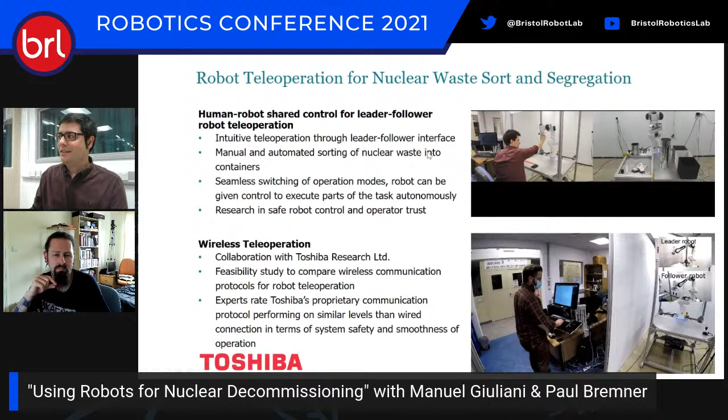We are also looking at the immersion of the operator when using the system, which we're going to show in the live demo as well. We're interested in controlling a third robot arm placed in front of the remote robot, controlled by the movements of an operator wearing a VR headset. So the movements of the operator are mirrored to the movements of the robot, and the operator can actually control the robot with his own head.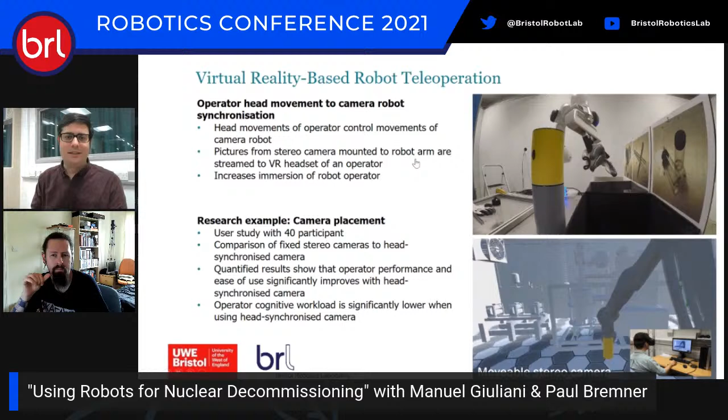And I'm going to hand over to Paul now to talk about our work in the RNE project. So on the RNE project, we're investigating the idea of using multi-robot teams to solve another problem within the nuclear decommissioning industry, that of mapping and characterization of sites to be decommissioned.

Within nuclear decommissioning, an early and vital stage in the process is characterization and mapping of sites to be decommissioned. Many sites, particularly at Sellafield, reached the end of their operational life some time ago and were sealed up in concrete shells until they could be decommissioned. As a result, the exact layout and environmental conditions need to be surveyed so that decommissioning operations can be planned.

In particular, when you have a heterogeneous robot team - a robot team composed of different robots with different sensor suites - those different sensor suites can be combined together to more effectively map an area. One of the things we're currently looking at is how we can enable robust communication between such a robot team, as well as with a teleoperator of the robot team.

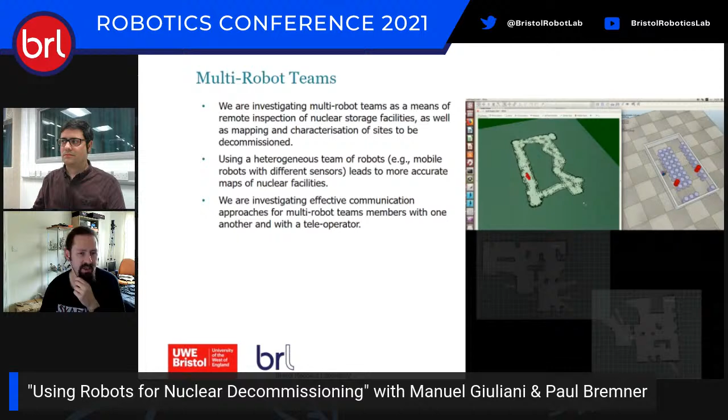As I mentioned, the environment in which the robots operate is highly hazardous. So in order for robots to operate effectively in such an environment, they need to be aware of the risks within the environment - those risks could be radiation, collisions, communication loss, and so on. We're investigating using a control architecture based on a layered cost map, where the risks in the environment are mapped onto the environment and combined in a hierarchical way to influence the control decisions made by the robot.

Those risk decisions then need to be conveyed, as well as the communication information, to the teleoperator. So a key component of the safety case for robots in nuclear decommissioning is to have a human in the loop.

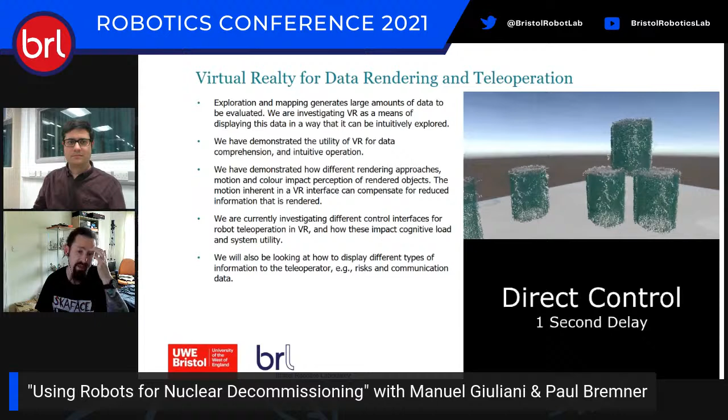So that's typically a teleoperator, but it might be more of a supervisory role when we're looking at semi-autonomy rather than full teleoperation. We're investigating using VR as a way of intuitively teleoperating these robots, as well as a means to display the kinds of data that they generate.

The videos we've got show the VR interface I've been working on for displaying data, whether it's point clouds or voxels. We also have a video on work a PhD student has been doing on teleoperation interfaces for controlling a single robot, which we need to extend to the multi-robot system.

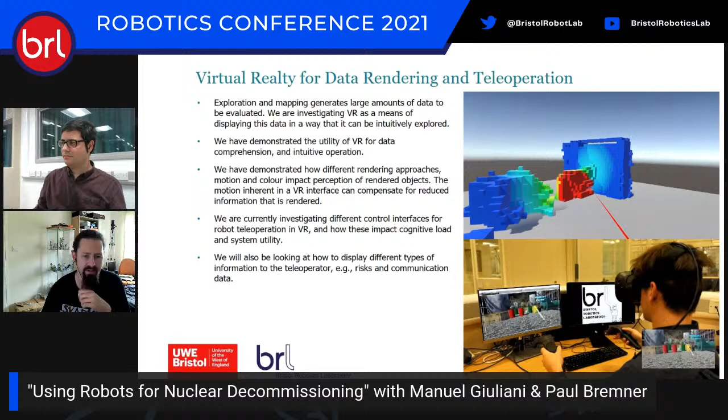Through a series of user studies, we've shown the effectiveness and intuitiveness of using VR for this process, and also the benefits of being able to move relative to the data, which allows you to still recognize objects even when you've got impoverished sensor data.

All the robots, as I talked about, might not have the same suite of sensors. You might have a lack of color information because you've only got a laser scanner on a certain robot, but you still need to be able to operate on that data to decide you need more information about that area, and direct some members of the robot team there. That's the benefit we're finding with the VR system.

What we're currently working on is being able to incorporate display of the data relating to the risks perceived by the robot team, as well as the communication information. So move on to the next.

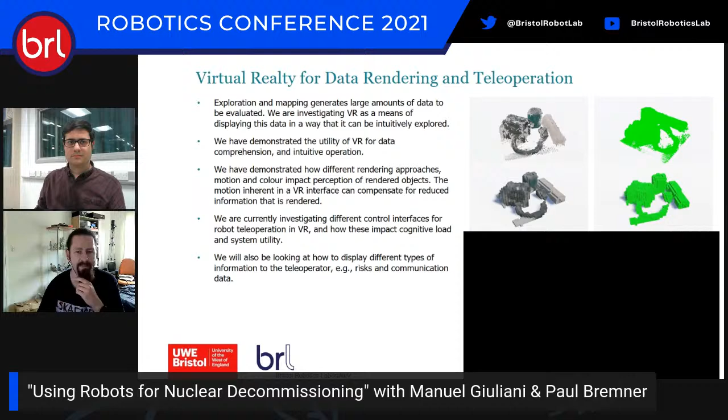As part of our work in the nuclear sector, we're actively seeking industry partners. We've got prior experience in industry-funded PhDs, fairly recently having a student complete a PhD funded by the Nuclear Decommissioning Authority. The university has recently made more funding available for PhDs part funded by industry, and we already have one PhD proposal fairly well developed that's in need of an industrial partner. We're interested in finding more PhDs and more partners.

As Manuel mentioned, as part of NCNR, we work with Toshiba. We've also got a project with them with Cavendish as part of NCNR, and Sellafield are a partner on RNE. We're seeking to continue that involvement of industry in our bids going forward.

We've got two bids currently in preparation, one that I'm working on looking at modulating presence. One of the things Manuel talked about was immersion in VR, which relates to this sense of presence in your VR environment and how that affects how good you can be at operating that environment, and how we can modulate that using additional sensory modalities like sound and haptic feedback.

The second bid involves another program grant for development and management of a robot fleet for infrastructure maintenance and repair. So we now have two demos scheduled.

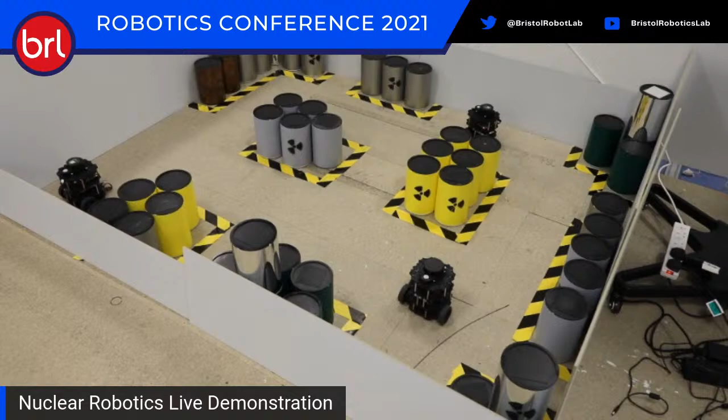Let's move to the solo layout. So, to the team in our test bed, if you could start the mobile robot demo now, that would be great. And Paul, you're going to comment, right? Yes, and sorry, we also have a live view. So this is the live view of the screen for operating the robot.

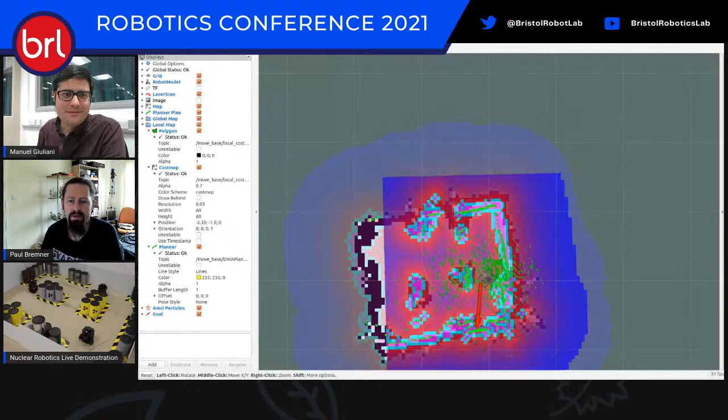This is a mock-up environment, a scale environment of a nuclear facility. We have some barrels marked up in the environment—the radioactive marked barrels are assumed to be radiation sources. The dark yellow colored barrels are assumed to be corroded and therefore have a temperature risk, as well as there also being risk of the robot potentially colliding with things.

So it uses all of those risks to create this layered map, which then hierarchically ranks all the risks and takes appropriate action based on what it thinks is the least risky path to achieve its navigational goal. Here you can see a live view of this risk map. Maybe back to the robots—you can see the robot adjusting its strategy or how to move from one point to the other based on the risk.

We're going to switch back and forth between the view of the map and the live robot view. It's having to plan and replan as it senses additional risks, I think.

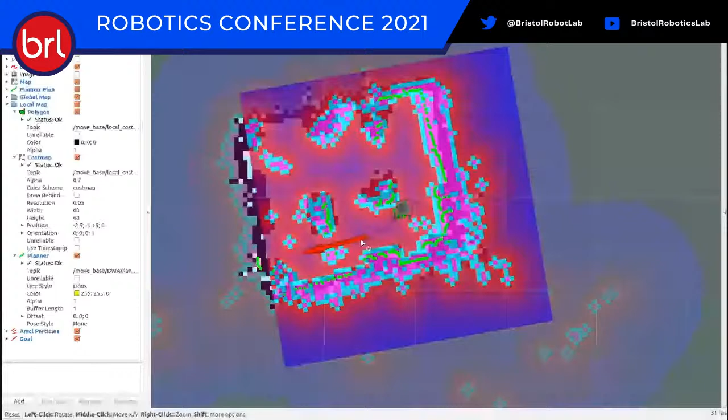What you can see rotating on top of the robots is actually a LiDAR, a rotating LiDAR, and the robots are taking live measurements of their environment.

At the moment we are not using any other sensors on the robots, but the plan in the future is to have heat sensors and radiation sensors also mounted on the robot. We are at the moment obtaining a simulated radiation sensor that will be mounted on the robot, because of course we can't have real radioactive material in our lab.

Alright, Alex, can you move the camera to the other demo now? Thanks to Jennifer David, who's the main researcher working on this, on the robot maps, we are now going to show you a live demonstration of the teleoperation setup.

Andy West asked in the chat if the robots are sharing a map. Yes, at the end they will be sharing a map. At the moment, I think both of the robots are independent, like in this demonstration that we had, but the goal is for the robots to share a map in the end.

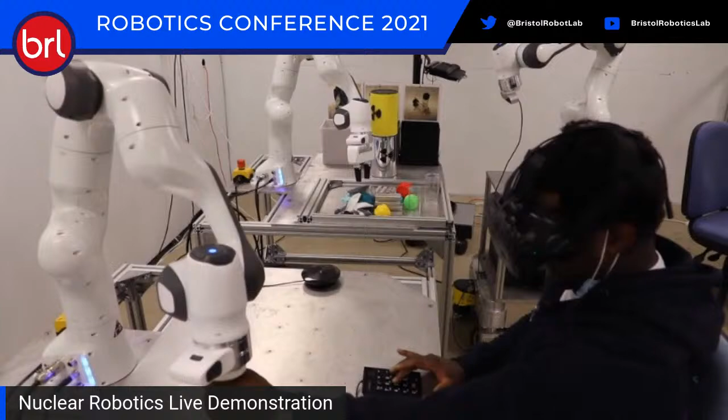As part of this interactive session, we can now ask you to pick objects that Joseph should pick up, so that you can believe this is actually a live demo. So what do you want Joseph to see picking up next? Should he pick up the yellow ball, green ball, red ball, or any of the blocks there, or whatever you prefer? Please put your preference in the chat.

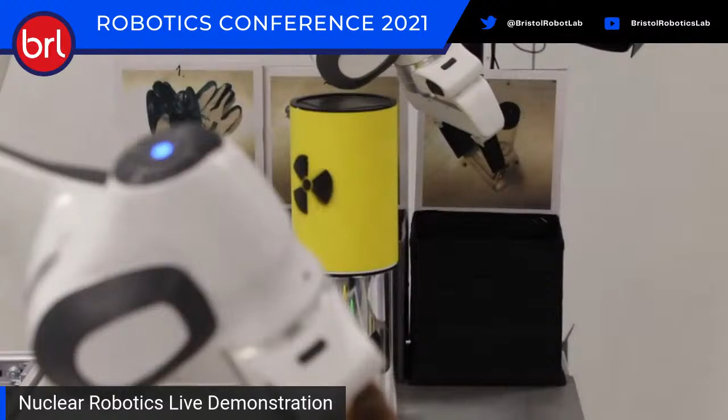Obviously, Joseph is now physically sitting next to the remote robot, but in the future our goal would be to have the operator sitting outside of the facility with cables running into the facility, and the remote robot away from the teleoperator. As you can see, this kind of system is quite intuitive to use.

We have actually shown this system at a trade fair, at a conference in October 2019, and had over 50 visitors at our booth on the day who were able to simply use the robot without any problems, without any training. I think this is really something we are quite proud of, that you have a very simple system to use that you can use without a lot of training.

So, any more objects that you would like Joseph to see picked up?

So one thing I forgot to mention: you see there are 2 barrels stacked next to the remote robot, a silver barrel and a yellow barrel, and we have actually created a virtual force field around these barrels.

Joseph, when you pick up the next object, can you try coming physically close to the barrels? What you can't see in the demo is that Joseph is actually feeling a virtual force being applied whenever he comes too close with the remote robot arm to the barrels. So Joseph is trying to push against the barrels, but he can't because of this virtual force field. The robot is preventing Joseph from potentially doing errors, especially while holding materials in the robot's arm.

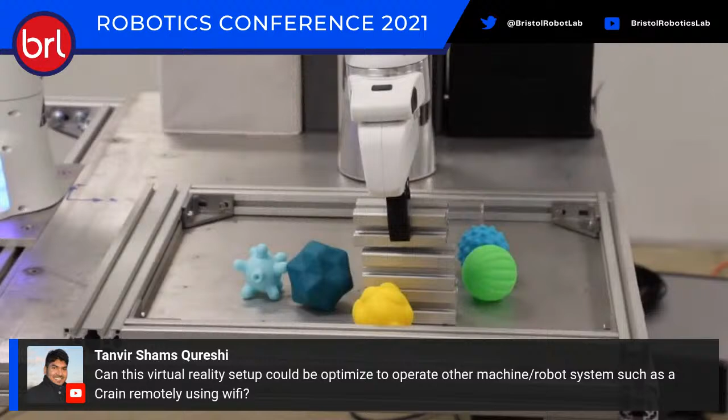Probably. This particular setup, you probably couldn't do because you can't really do a master-follower system with something large like a crane. But you could instead use more of a virtual reality setup, where you would have a virtual representation of the robot you want to move around, and you can move that around in VR, and that movement is then duplicated on the real system. That has the advantage that you don't have the physical tiredness of moving a real robot around, but also you can use a clutch system, so you can more conveniently position your arm where it needs to be in order to do the movement. You could hold the clutch down, move forwards, release the clutch, move back again, and then move further forward so that you can move beyond where you could normally reach.

Another question from Nayab Ahmed: can you let us know the camera system being used? Yeah, that's a Stereolabs ZED camera. It's a stereo camera, one of the few stereo cameras around on the market. Stereolabs is, as far as I know, one of the few companies producing these kinds of systems.

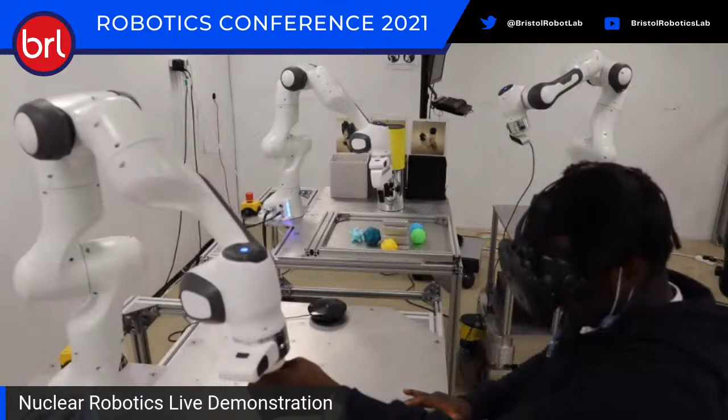Maybe to come back to this question from Tanvir, and then I think we have to close. In general, it's interesting that these kinds of teleoperation systems are not particular only to the nuclear industry. We find that many similar systems are, for example, used in minimally invasive surgery. Of course, in that case you have much smaller movements if you are inserting tools into a human body to do surgery inside the body, but the principles are very similar.

You have the same interaction principles, the same teleoperation principles, the same principles of having to avoid certain areas, for example, in order to keep the patient being operated on safe. So we quite often work together with colleagues from the lab working on minimally invasive surgery and medical robotics, because they interestingly have very similar problems to what we are dealing with in the nuclear industry.